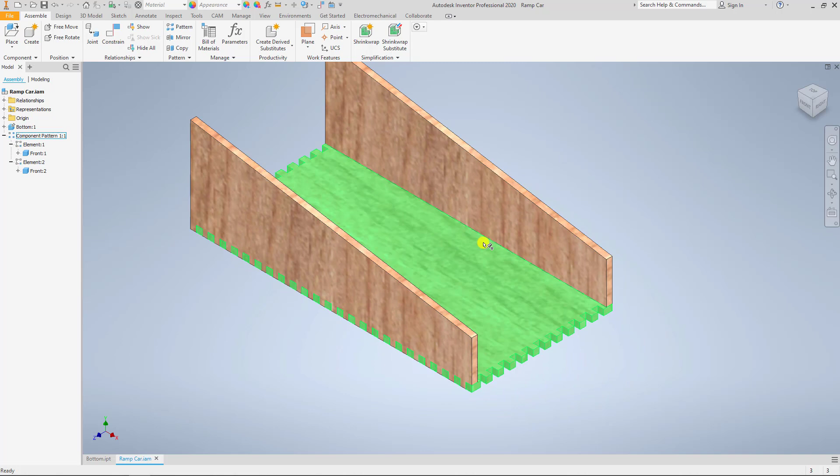So now we can take a look at the front, and we notice that the back and the front, or the left and the right, are not the same. So we're going to need different parts for that. Now we can make this more quickly if we're a little more efficient at making our parts. So let's go ahead and get started on the front. Let's call it the right side over here.

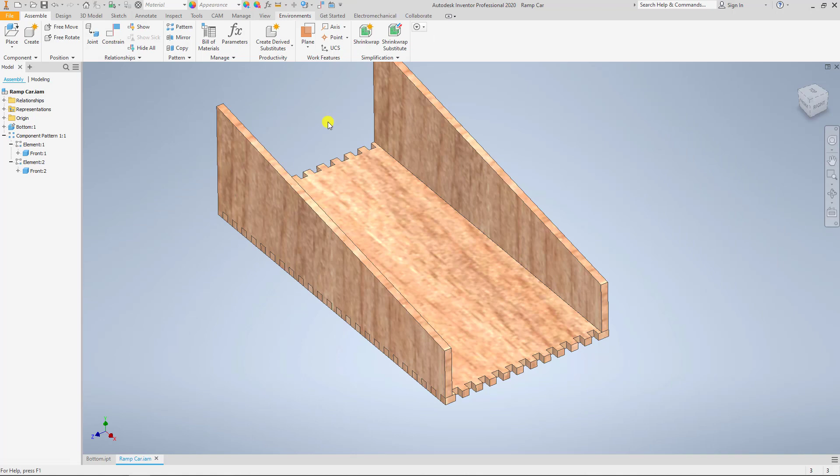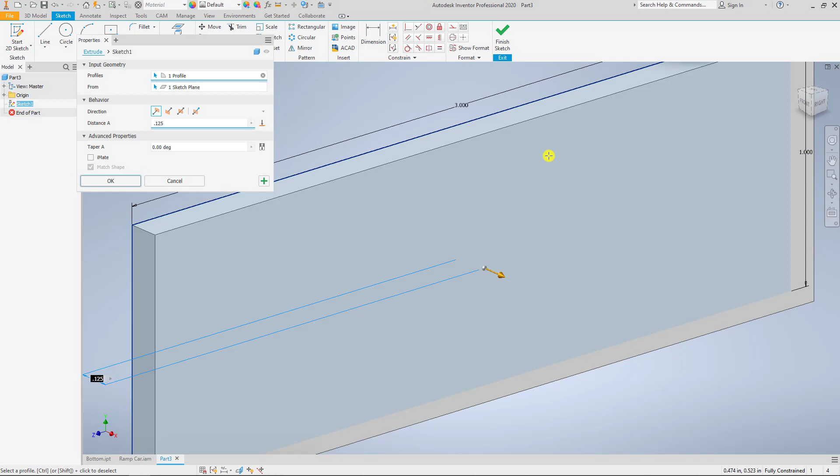So I'm going to start another new part, and I'm going to do a sketch on my right side. Throw in a center point rectangle, and that should be 1 tall by 3 wide. And we're going to extrude that 1/8 of an inch and give it its wood texture. I'm going to go ahead and save this as right. Again, how you name it, up to you, but this is just how we're going to roll.

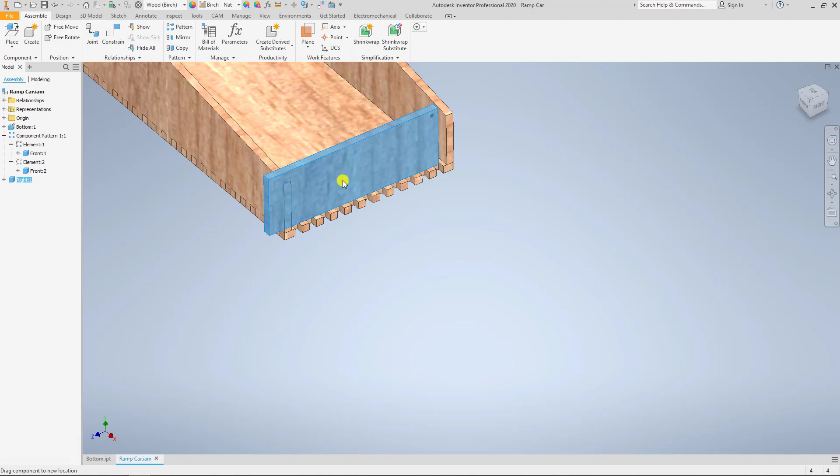So let's place our right side, and let's start to throw some constraints on there. So we can constrain this. Actually, let's flush up this and this. And so now we can drag this down, and if we flush up the bottom and then the outside, really what I'm checking for here is, yes, I know I'm going to have interference, but I want to make sure that my overall size is correct.

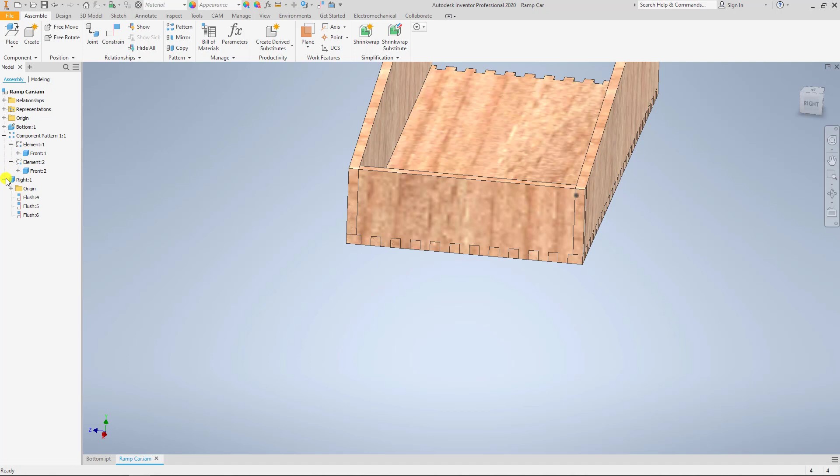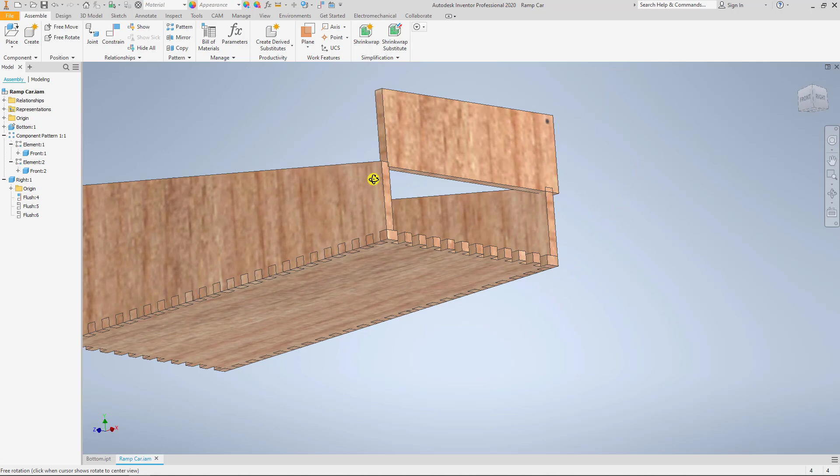And so it is. And so what we're going to do is we're going to come back and we're going to suppress those last two constraints. Pick them. So I selected one, held down the Ctrl button, bottom left of the keyboard, picked the second flush, right click, suppress. Now those constraints are suppressed so I can still move it however I'd like. So if I drag this up, what I can see is I've got to have a double notch here.

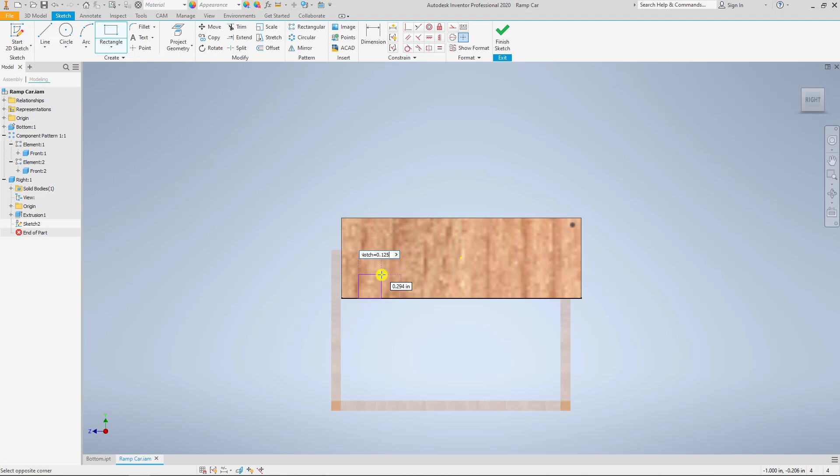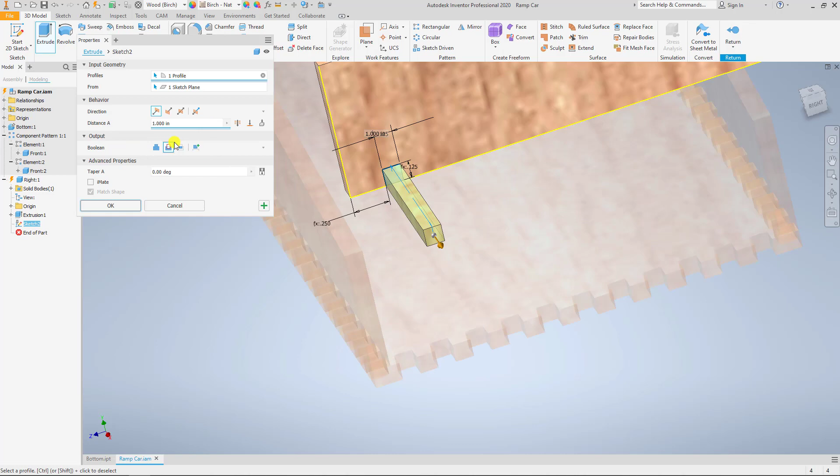So if we open this part and sketch on the front, same thing as before. I'm going to go ahead and throw in notch equals 0.125, and then I'm going to dimension my height as notch. If I spelled it correctly, that would be good. And then the width over here will be notch times 2. Now when I finish that, I'm going to extrude that as a cut, again through all, and I'm going to return. And then I'm going to unsuppress my two constraints real quick, and I'm going to see if that's correct.

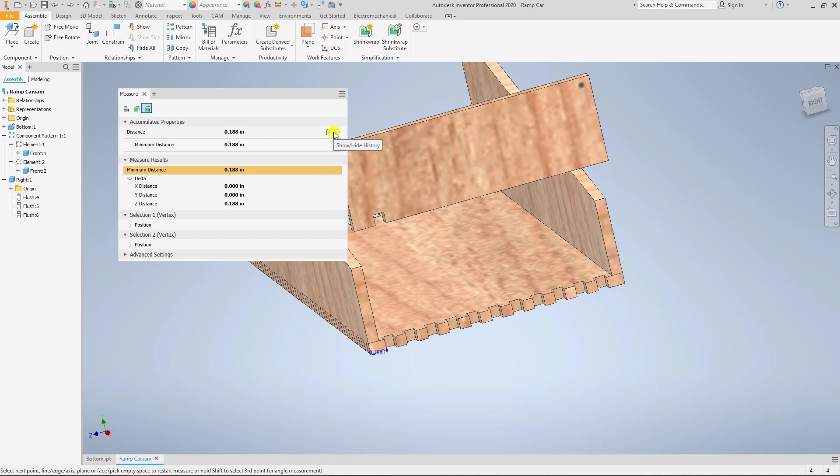And that is not correct because we did this centered up. Okay, so no big deal. So we'll come back, and we'll get a dimension, and we'll just use a straight dimension for this. So this is probably 0.1875. So we can open our part, open our sketch, finish that up, and return.

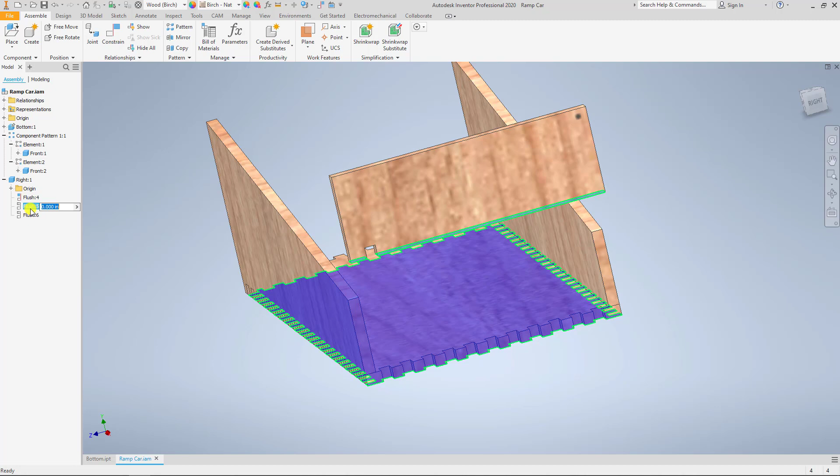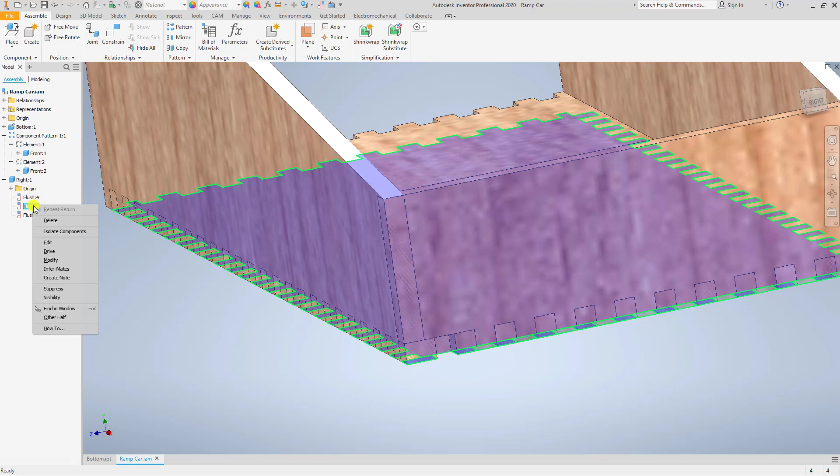And so now if we unsuppress our two constraints, we can see that that is correct. So let's take our bottom constraint here and suppress that only. Nope. Okay, so we did get that wrong. All right, no big deal. So this needs to be a cut.

See, this is why I like to do this method. This is not one of those teachable moments. Oh, you know, look, I made a mistake. Oops, how do I fix it? That's a legit mistake on my part, and it's not a big deal. It happens to everybody. So I guess it is a good teachable moment, but it wasn't planned.

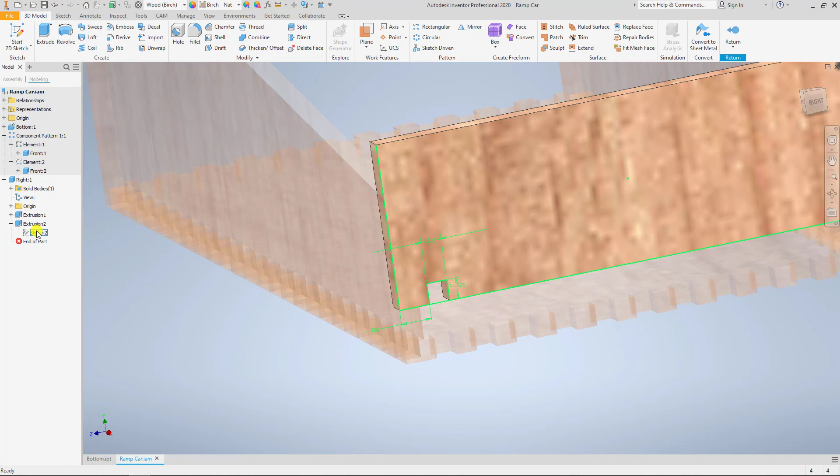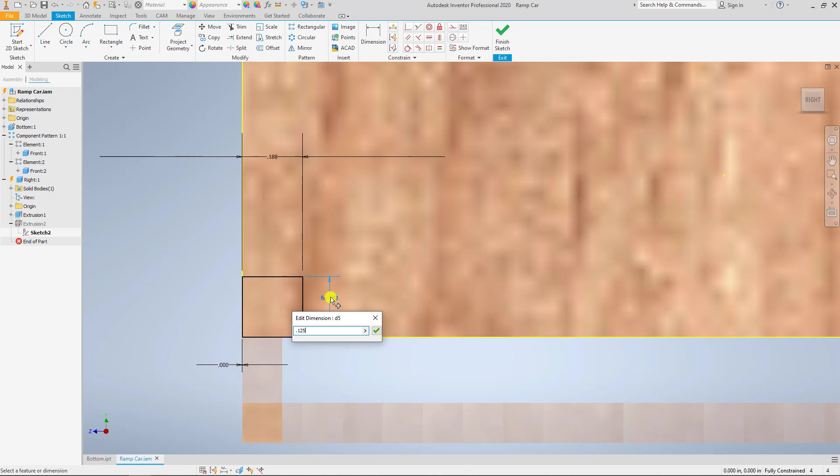So let's go ahead and let's set this to equal 0. And there's a reason that I'm doing this, and it's because I want to use this same part. So we're going to go ahead and leave this set up just like it is. And then that's going to be my first cut. So we're going to finish and then return.

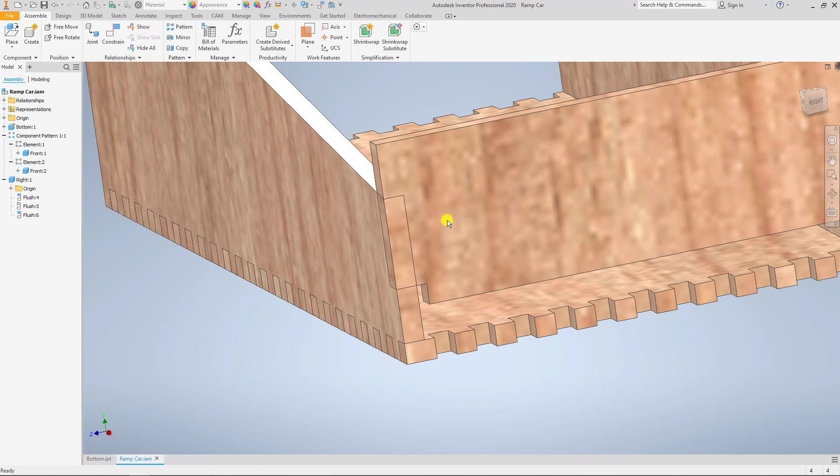And let's save real quick. And the nice thing about saving while you're doing this is it says, hey, the right and the assembly file need to be saved. Do you want to save them both? Unless you've got a really good reason why, always say yes. So we're going to drag this down, and now that looks correct. And so now we can put in our second cut.

So if I open this up, I can come in here, and we can see that this is already called in here. Let's see, what do we got? We've got sketch 1, extrusion, notch. So we're going to change this to lowercase d4. And then we're going to hit add numeric. And then we're going to add our, oh, because it hasn't, okay. Let's see if that held. Okay, so now we can get rid of this notch_1. We can set this to equal 0.125. Okay, so we're fixed, we're good.

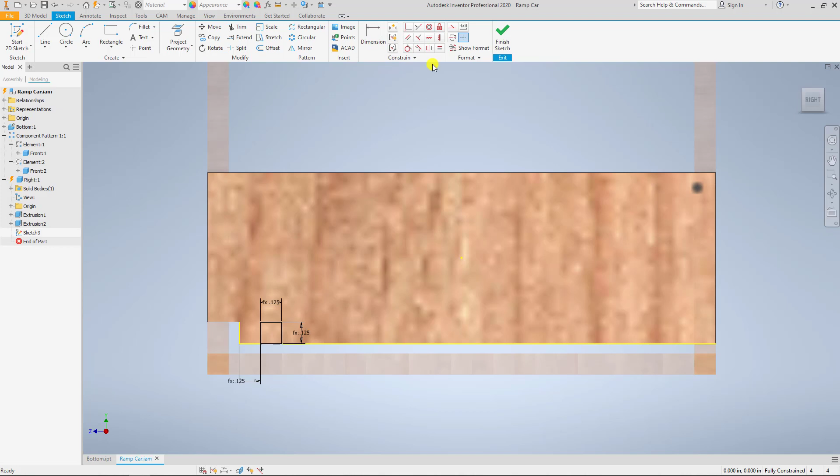So now I can sketch on the front face here, draw a rectangle. This is equal to notch, notch, and then my location will also be equal to notch, or I can just pick one of these since they're all tied together. Extrude that as a cut through all. Okay. So now we know that that's correct. We can look at our part. We can see that everything looks like it's going to line up correctly. So now all we need to worry about is our other side.

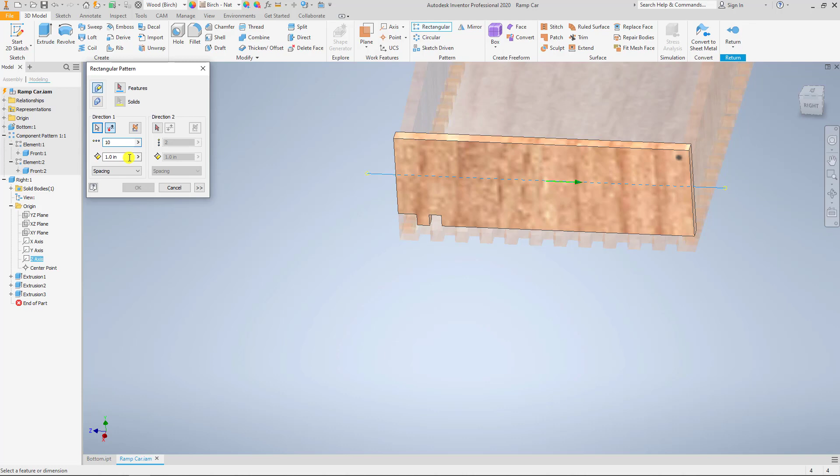So what we want to do is we want to go ahead and pattern this extrusion along the z-axis. And we want to flip that. And let's make our quantity 10. And I don't think it got our feature. There we go. Notch times 2. And that actually looks correct, which is good.

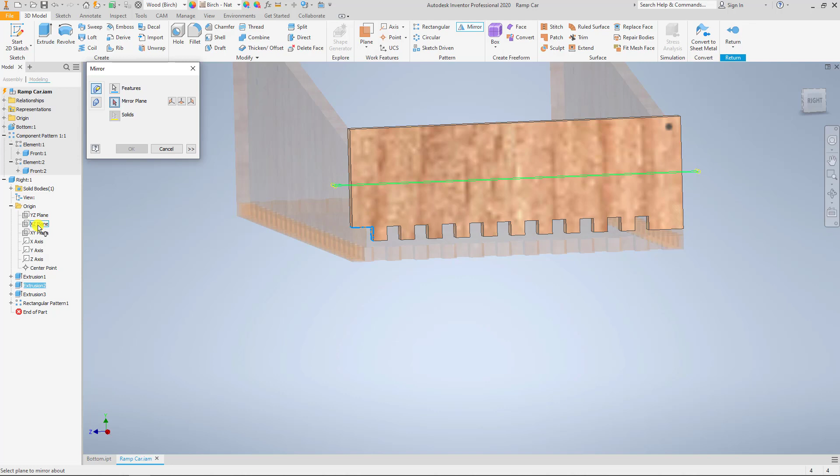And then what we need to do is we need to add one more cut over here to compensate for this solid down here. And we'll do that by mirroring our first cut along the XY plane. Now when I drag this down, I'm not worried about the sides. I'm only worried about this piece and the bottom. So when I drag this down, I see that this lines up perfectly.

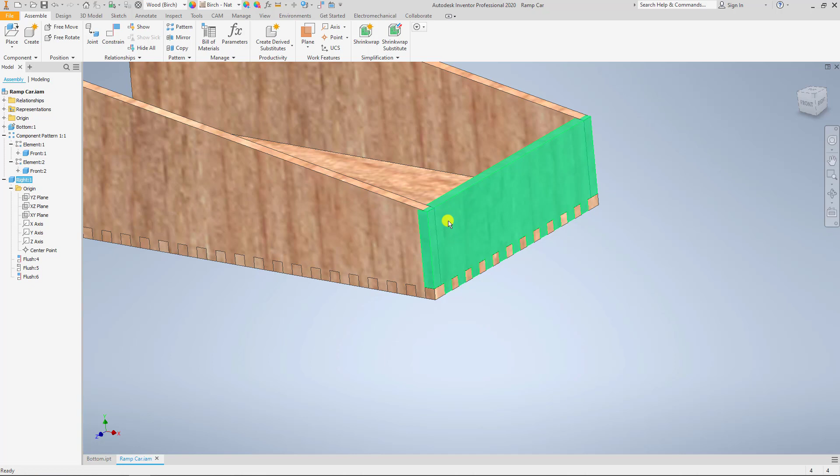So we're good. So off video, I'm going to go ahead and do the exact same thing between my side and my front, which is also the back. And we're going to get that all done up. I don't want to take up time on the video for that. And I will see you guys once that's done.